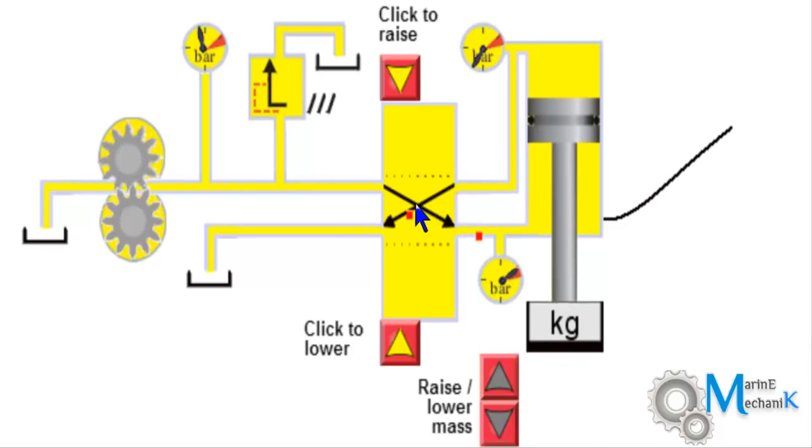We have to click here to raise the piston up so that it lifts the weight. Now I'm going to do it, click to raise. As I do it, the valve position changes and the oil flows and the piston rises up. The oil from here follows this channel and goes underneath the piston, pushing the piston up, and on top of the piston, if there is any oil, that gets relieved back to the tank. This is how the system works.

You can see the pressure here. It reaches maximum pressure, after which no more oil will flow, where the safety pressure relief valve safeguards the system and avoids any rupture of the pipelines. As you can see, the gear pump continues to work and the excess pressure is relieved back to the tank.

Note that the pressure near the piston and the pressure after the pump is almost the same, whereas the pressure here is 0, which means there is no oil pressure on the return line. Now looking at the graph, this shows the rate of rise of pressure to complete the work done in lifting the piston for this particular weight.

Now I'm going to put it back to neutral position, where the pressure drops immediately because there is no more flow of oil as all the ports have been blanked. Now the pressure starts to fluctuate and you can see the piston slowly starts to drop down because the weight

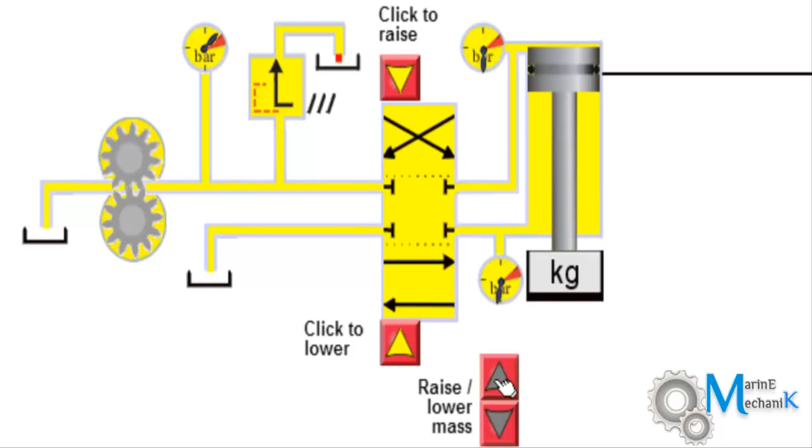is going to compress the oil and increase the pressure here. I will show you with a little bit more weight. I'm going to add the weight. When I add the weight, you can see there is an increase in pressure and slowly the piston starts to come down automatically even though the ports are blanked. This means the oil beneath the piston is getting compressed, and you can see that by an increase in pressure.

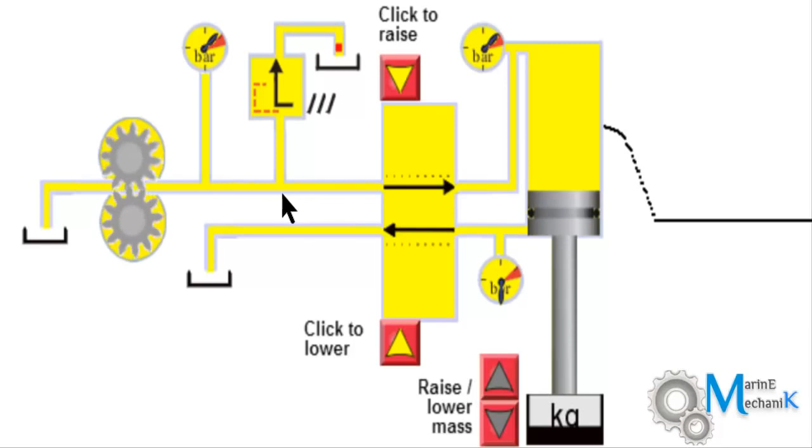This is also evident through the graph. The oil beneath the piston, which was under pressure, gets expanded now. Now I want to lower the piston, so what I'm going to do is click on this. As I do that, the oil flows directly on top of the piston, which is indicated by the pressure here, pushes the piston down, the weight goes down, and the oil which was underneath the piston drains back to the tank. Now on top of the piston this is full of oil and the piston can no more go down. Thus, the pressure relief valve or the safety valve lifts and drains back to the tank.

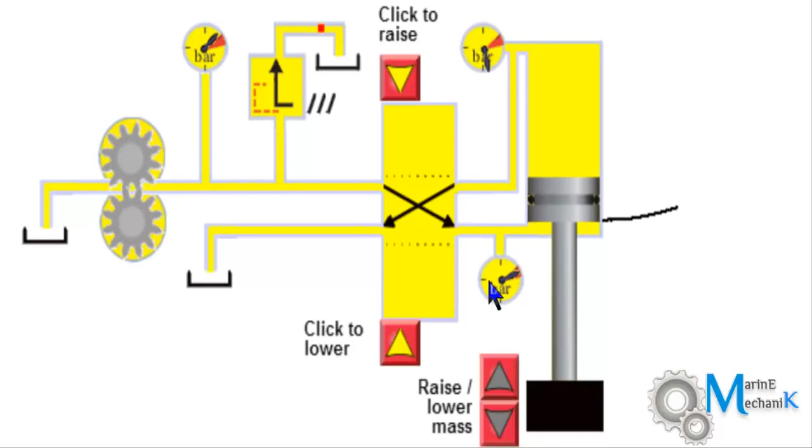Now I'm going to increase further weight. I'm going to put it at full load. Now let's see how does this work. I'm going to raise the piston up. Now in neutral position. Now I'm going to raise it up. Now you can see the pressure is fluctuating so badly because the weight is maximum, or the load is maximum, and the time taken to lift the piston up is more than what it was in lighter loads.

Again, after lifting up to the topmost position, the pressure reaches maximum, which is same as the line pressure, and then the safety valve lifts and relieves the excess oil. Now I will bring it back to neutral position, and due to the excess weight you can see that automatically the oil is getting compressed and the piston drops.

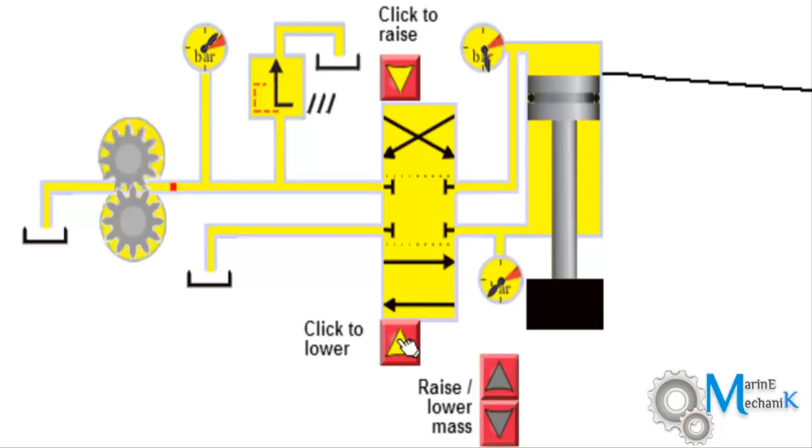So let's lower it now. You can see since the load is high, it will lower much faster. The drop is much faster because the load on the system is too high. So even by gravity it can easily come down.

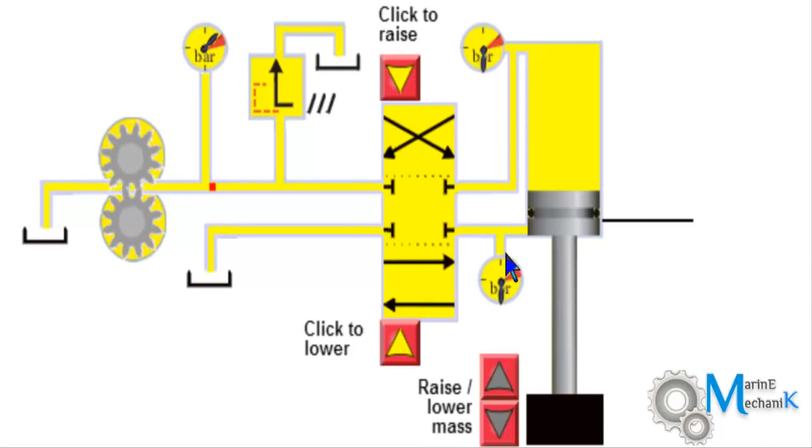Let's once again see how does it rise. Bring it back to neutral. Both the pressures are 0. Now I'm going to lift it up. Now the oil starts to flow underneath the piston.

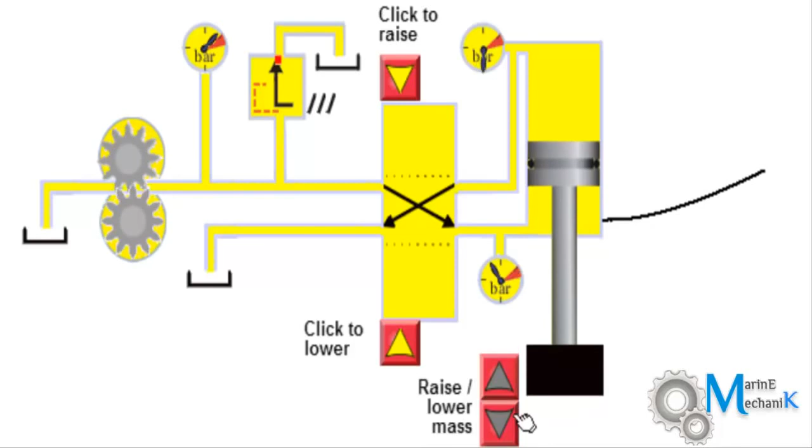Let me reduce some mass. As I reduce the mass, you can see the piston goes faster. Now I've kept it at the lightest load, and let's see how fast it takes to lift up again.

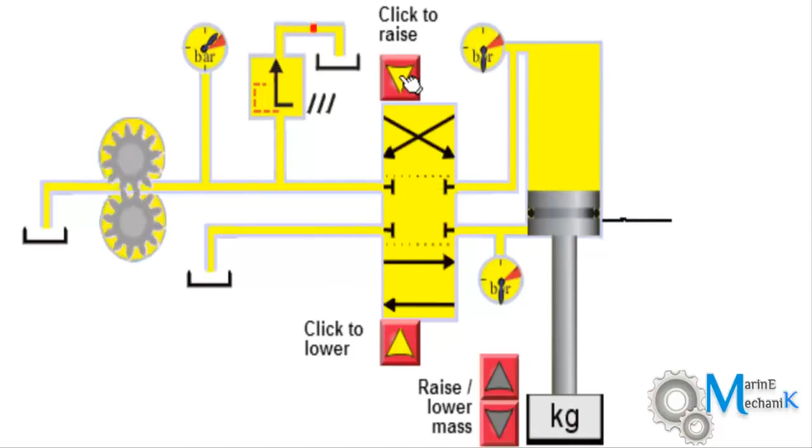Okay, I'm going to lift it up again. This is in neutral position. It will be too fast when we compare it with full load. You can see the graph rise immediately and the piston reaches the top within a very short time.

So that's the basic understanding of any hydraulic circuit which requires to operate with load. Hope this explains the basic operation of the hydraulic system.